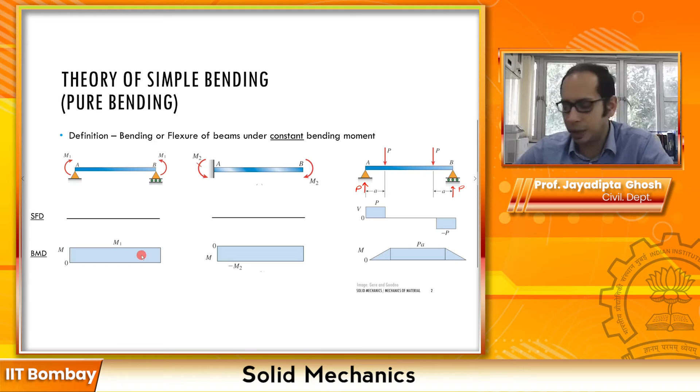Now why do we have a constant bending moment? Remember the formula we derived while looking at the relationship, dm/dx equals v. So for the moment to be constant, for it to be a case of simple bending, meaning moment is constant, or pure bending where shear is 0 - if you put v equals 0, that means your moment is a constant bending moment. So this is one of the cases.

And here, if you just take a look at the moment, how do we expect this beam to bend? This beam would most likely bend something like this. So it is a positive convention - remember the sagging effect, which we term as positive. As you see, the entire bending moment is in the upper half plane - it's a positive m.

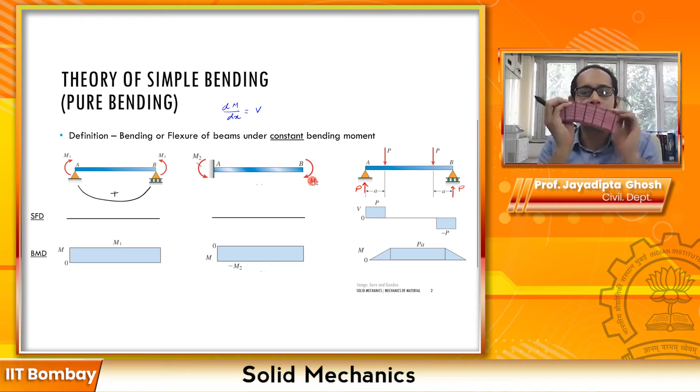In contrast, if you look at the second beam where you have a cantilever and you're applying moment m2 - so what you're seeing is a hogging kind of moment. This beam bends something like this, so it is a negative bending. The entire bending moment diagram is in the lower half plane with a value of minus m2.

In both these first two cases, the shear force is 0 along the entire length of the beam. But if you take a look at the third case, here you have a beam with two intermediate loads P, resulting in two reactions P and P. Now if you draw the shear force diagram for this beam, following the relationship closely, you start with a vertical P, go as a constant line, and here you are meeting a concentrated load.

So there is going to be a jump in the shear. What was P comes back down to 0. Since there is no load in between, you get a constant shear force of 0, and in this region you will have a constant bending moment of PA.

This case is very similar to what we looked at with the weightlifter. If you look at the weightlifter's hands, at the two ends you have the two loads going down, and in the intermediate you have the support. So it's essentially the similar beam, just flipped.

For the weightlifter's case, let me draw it slightly below. So the weightlifter's case will be something like this, where you have the weights going down at the two ends, and intermediate you have the weightlifter's hand.

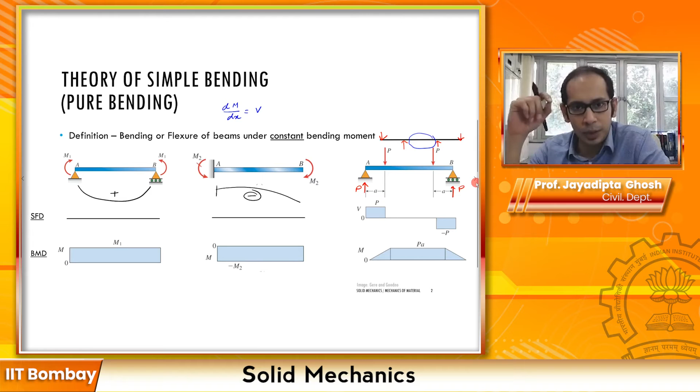Now that we know what pure bending is, essentially it is sections where the bending moment is constant. In those regions where the bending moment is constant, how does the beam deflect, or how does the beam behave? Let us take a look at it.

If you consider sections in pure bending, it bends the beam into the arcs of a circle. If you have a beam, regardless of the cross section - remember we always keep in the back of our mind that the cross section has to be rectangular - that is not the case.

Your beam can have different shapes, as long as it's prismatic, all these derivations and assumptions are valid. So instead of a rectangular cross section, if it's a circular beam or a trapezoidal shape, if you have pure bending with constant bending moments, it is still going to bend in the arc of a circle.

So what it essentially means is that you will have a radius of curvature. Let's say the radius of curvature is rho over here, and this rho along that particular arc stays constant. If this is my point D intermediate, and I mark two more points, B and C, at B the radius of curvature is rho, at D it is rho, at C the radius of curvature is rho as well. So essentially it bends into the arc of a circle.

Now that we understand how the phenomena of pure bending acts, how it deflects the beam, and points along the beam bend into the arc of a circle, in those regions we'll have a constant radius of curvature. Remember, if you have to draw parallels between positive curvature and negative curvature, it follows closely with your concept of bending moment.

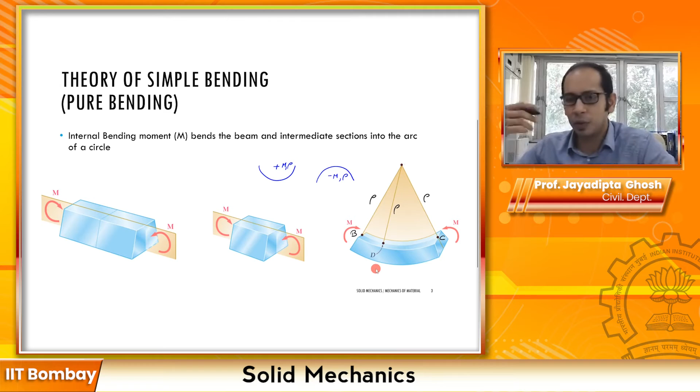So let's go ahead and take these concepts a little bit further. If you consider a beam, for example this cantilever, where at the end you are pulling vertically up with a force P, the deflected shape of the beam is something like this, and from this you can tell that it is a sagging kind of movement.

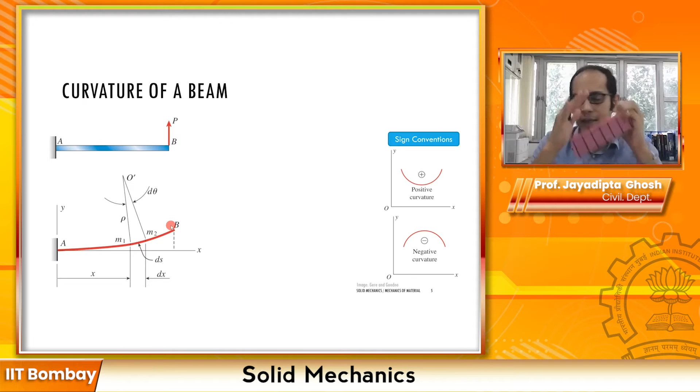So if you are doing like this, it is a sagging kind of movement, so it's a positive curvature that you're looking at. So this is what we were showing, a positive curvature and moment also. Let's make a note of that as well. And this is a negative curvature and a negative moment that you have, right?

So here, if we now have to write the formulations for the relationship between the curvature and the angle, since we are saying that this bends in the arc of a circle, we have this rho over here, and say this beam was originally around the x-axis, and for small deflections, let's try to write some of the relationships that might exist. So this length ds, which is a small arc of the circle, we can express as rho times d theta equals ds, where rho, which I marked, is nothing but my radius of curvature.

Now, what is the relationship between the radius of curvature and curvature? We have kappa, another Greek symbol you're probably familiar with to represent curvature. So kappa equals 1 over rho, and kappa is nothing but the curvature, the reciprocal of the radius of curvature. So what we can get from these two relationships is that kappa equals 1 over rho, which will be equal to d theta by ds.

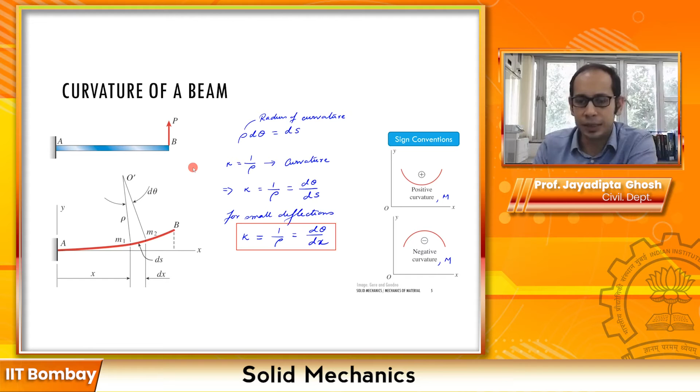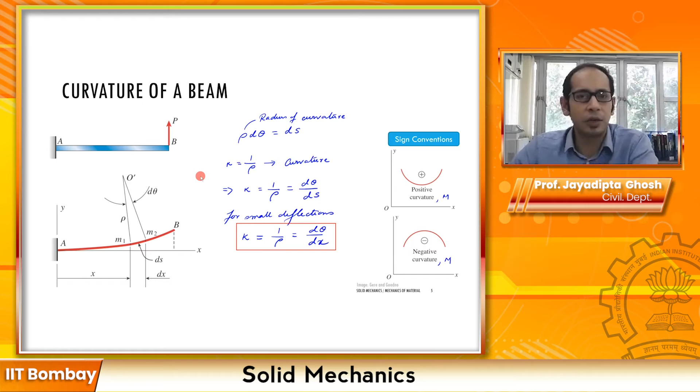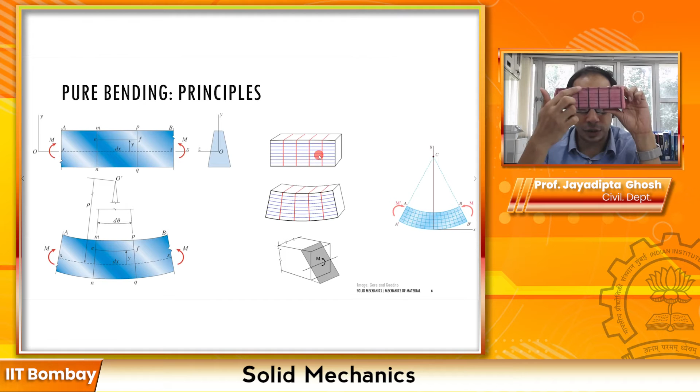If you consider this top black line between the end vertical lines, and this bottom black line over here, initially in the undeformed configuration, both these lines, the top one and the bottom one, are of the same length.

Now when I am bending this one over here, can you see the change that is happening? The top line actually contracts and the bottom line expands. So what does that mean, and what kind of moment is this? This is sagging, a positive moment, right? So there is a reduction in the length of the top line but an expansion in the length of the bottom line.

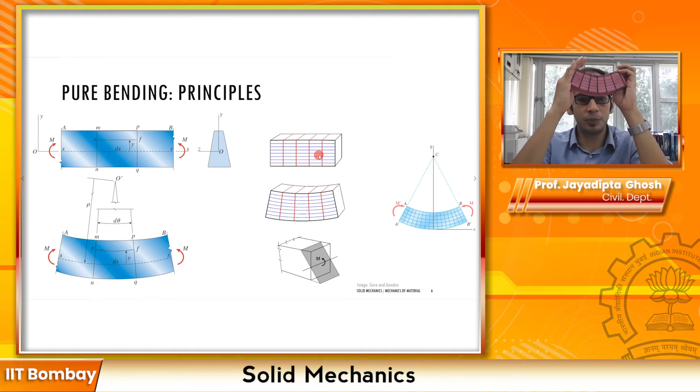Of course, if you're bending it the other way, you will have a completely opposite phenomena, where the top line undergoes an increase in length and the bottom line undergoes a decrease in length. So if one of the lines is decreasing and the other is increasing, in between the top and the bottom there must be one line which does not change length at all.

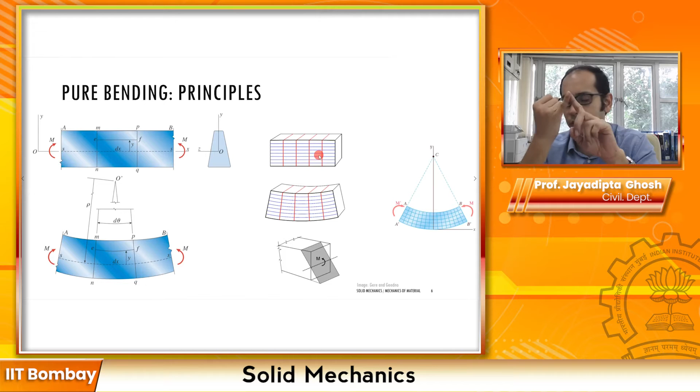Okay, so what are the three things we looked at? First is that plane sections before and after bending remain plane. So there is no warping, no sections being twisted out of place. The plane sections remain plane.

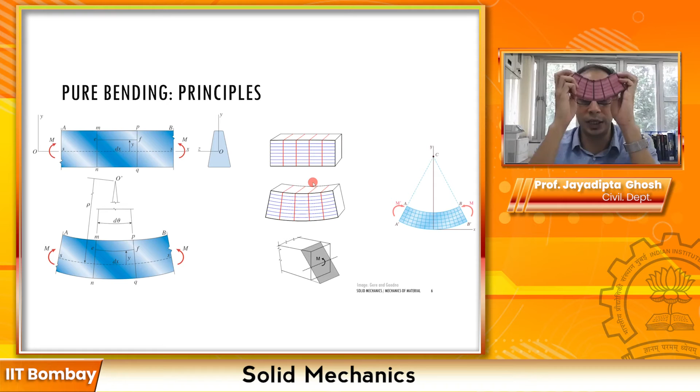Looking at the positive bending moment case, the top line contracts and the bottom one expands. The top line contracting means the top part is undergoing compression, a shortening in length. Whereas the bottom part of the beam is undergoing tension because it is undergoing an expansion in length.

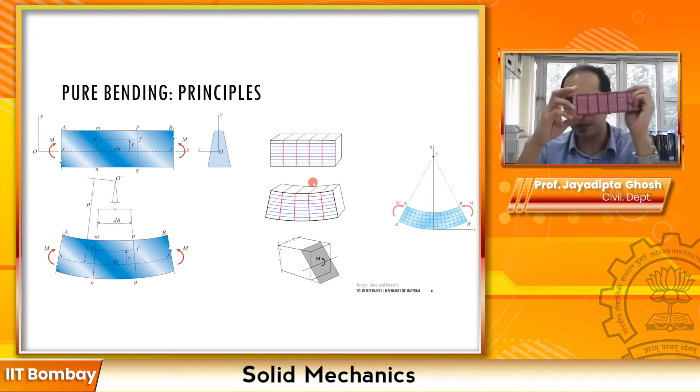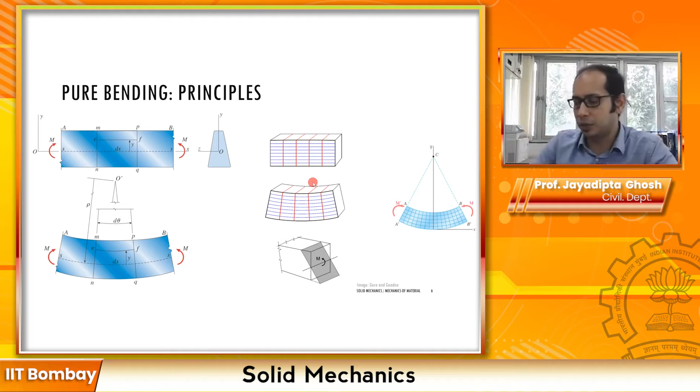And consequently, in between the top and the bottom, you must have a line which is known as the neutral axis. That particular line does not undergo any change in length. So that brings you to three of the primary assumptions of pure bending.

It states that plane sections remain plane before and after bending. That's the first one. The second one is that the bottom of the beam is in tension, it elongates, because initially both lengths were the same, now the bottom one has elongated and the top one has contracted. So the bottom part of the beam is in tension and the top part is in compression.

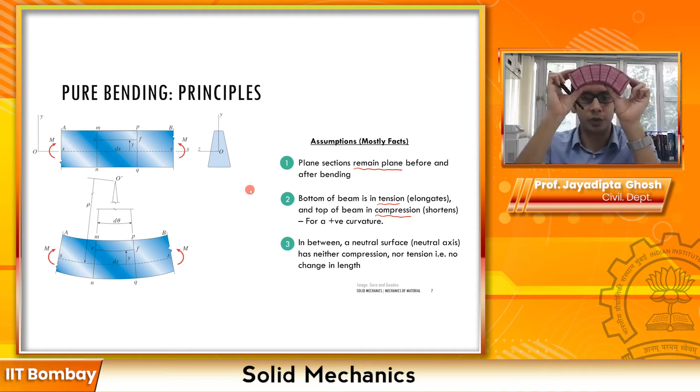But remember, this is for a positive curvature only, for the positive moment and curvature. If you are making a hogging moment, a negative curvature or negative moment, then this statement will just flip, the top part of the beam will be in tension and the bottom part will be in compression.

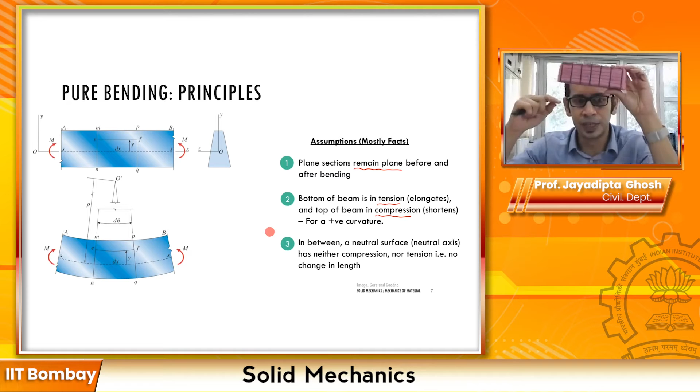And the last assumption is that in between the top and the bottom there must be a line. So among any of these horizontal lines across the length of the beam, there must be one line along which there is no change of length, because the top is shortening and the bottom is expanding. In between, you must have a line which does not undergo any change of length, or in other words, it has no tension, neither compression.

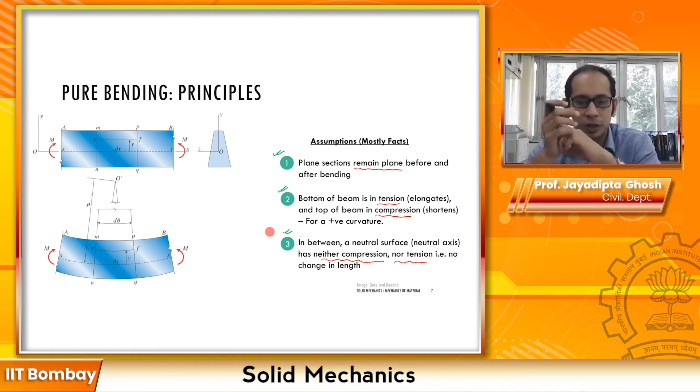So these are the three fundamental assumptions, or mostly facts, because for pure bending these are facts: plane sections remain plane before and after bending; the bottom part of the beam is in tension and the top part is in compression for positive curvature; and in between you must have a plane which is very importantly known as the neutral axis, often written as NA in books, where there is no change in length, or essentially no tension or no compression.

What we're going to do next is take these assumptions and look at the cases where we derive the flexure formula, making use of some of these assumptions and also the curvature formula that we looked at.

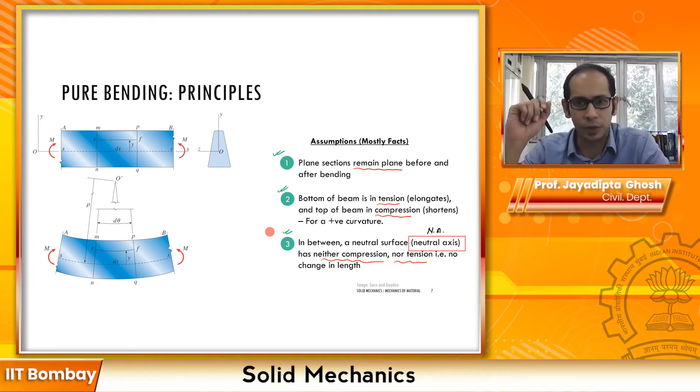Now we are going to derive what is known as the flexure formula. Previously, if you remember, we derived the formula for axial loading and the torsion formula. So now we are going to specifically look at the case of bending.

If you remember, where we had left off was this beam under pure bending, with an M and an M. Some of the assumptions are that plane sections remain plane before and after bending, and the top part contracts while the bottom part expands - that is, the top is in compression and the bottom is in tension for the case of a sagging moment. In between you have a line which does not undergo any tension, compression, or change of length, known as the neutral axis.

So in this beam, let us mark this particular dotted line - let's say that is the neutral axis for our beam. There are ways to find this neutral axis that we will take a look at later. So we have this neutral axis where there is no tension and no compression, the length remains the same.

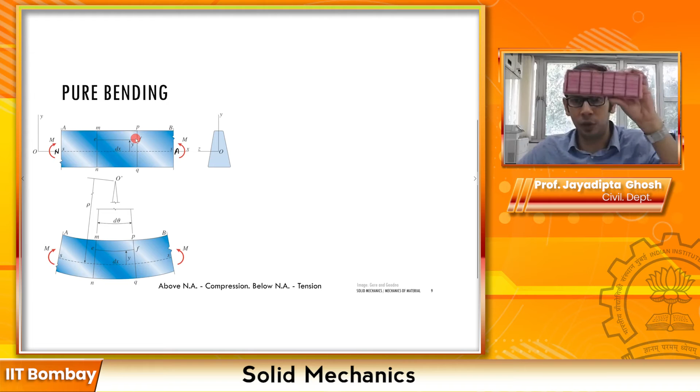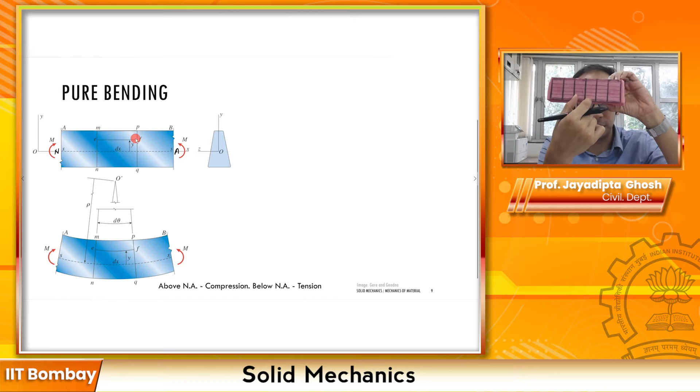Now before this beam, before you applied this moment M, this beam is straight. So whether you're looking at a length of dx at the neutral axis, or at the top or bottom, the length of each of these smaller chunks equals dx.

But the moment you apply these bending moments, the length of the line along the neutral axis stays as dx, because remember, the neutral axis is that line which does not undergo any change of length. So that length stays as dx.

But if you take a line above the neutral axis, in the region where you're having compression, that line contracts. We had seen that the top part of the beam, the upper half of the neutral axis undergoes compression, and the bottom half undergoes tension.

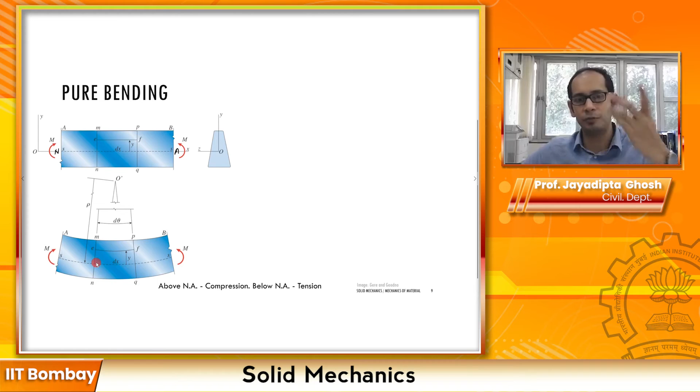So now let's start to write some of the formulations we may get when looking at these kinds of beams undergoing this level of bending.

So as we discussed, if we mark some of these points, this EF - I'm looking at this line segment EF. The original length of EF that you see here is just dx, because it has not undergone any deflection.

So the original length of EF is dx, which is the same as the length of this neutral axis, and the length of this line segment along the neutral axis has stayed as dx. But now in terms of this d theta and the radius of curvature - remember rho is the radius of curvature - I can write dx as equal to rho times d theta.

Now let's take a look at the same line EF again. What is the deformed length of EF? This EF is at a distance y from the neutral axis, and after the beam has bent, this EF has undergone a shortening. That's what we've seen - above the neutral axis the lines undergo shortening.

So what is going to be the length of this EF? That can also be easily calculated. That is going to be rho minus y times d theta. So EF is going to be rho minus y d theta.

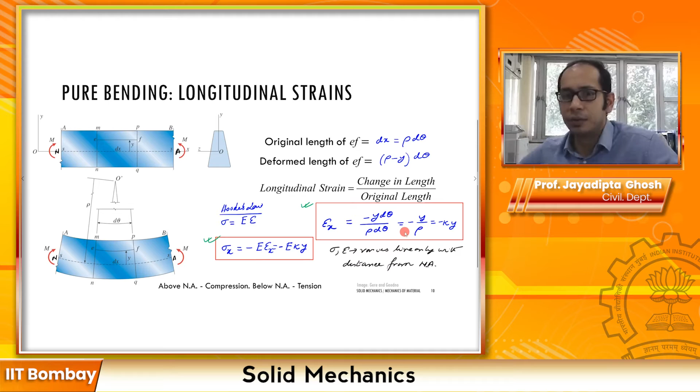So that's the only reasoning behind this particular sign, and no other reasons. If you understand the logic, you get a hang of it pretty soon. So now this is the general formulation that we get.

So to summarize quickly, this is a great way to visually see: this entire section, what was plane over here, this section was this rectangle. After bending, the plane section has remained plane and it has just bent something like this. Now as a consequence of that, at the middle line you do not have any stress or strain. So about this neutral axis, you have essentially this plane which is undergoing... you have a plane along the length of the beam which does not undergo any change of length, no compression, no tension, but as a consequence of this section moving like this, you can see that the top part...

It's very simple to visualize as well. If you do something like this, you see the top part is undergoing a compression, bottom part is undergoing a tension. And how does it happen? This is the general formula for that. You are having this compression over here, so you have this epsilon x is change in length, and this is the part where you are having the tension.

You might wonder in the formula, will the bottom part give a positive or negative value? If this is your zero line, you're measuring vertically up for positive y. If you take a point below that, you substitute a negative number, so minus y, and minus of minus y becomes positive.

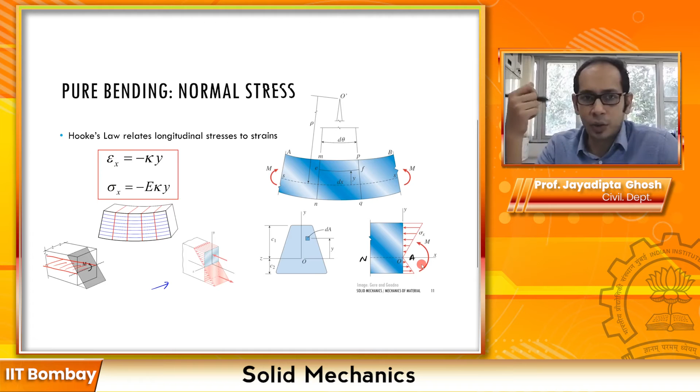Next we are going to use these relationships, especially the one for stress, to derive what is known as the flexure formula. Let's go ahead and take a look at how to derive it.

We're looking at the fundamental flexure formula, also known as the bending formula, which gives a direct correlation between normal stress and applied bending moment. We've seen that at every section of a bending beam, the normal strain and stress vary linearly from the neutral axis as you go above or below, but we haven't seen how these relate to the bending moment. The flexure formula gives us that.

To derive the flexure formula, we will make use of the first two equations of statics. The first is force equilibrium, and the second is moment equilibrium. Before we write and solve these, what comes out of the first equation of statics is essentially the location of the neutral axis.

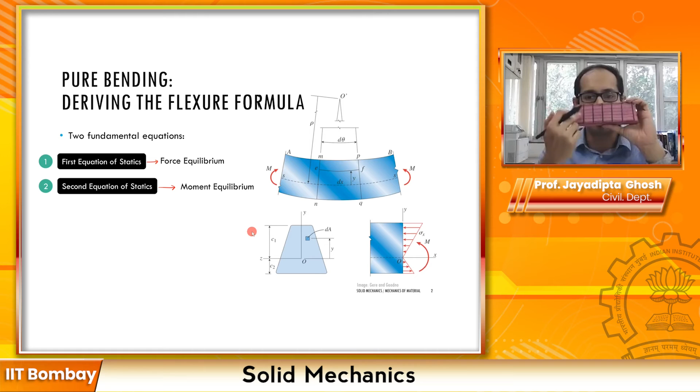When this beam bends, the top part contracts, the bottom part expands, and in between lies the neutral axis where the length remains the same and the stresses and strains are zero. Can you intuitively guess along which line the neutral axis lies? You probably can guess it lies about the centroidal axis.

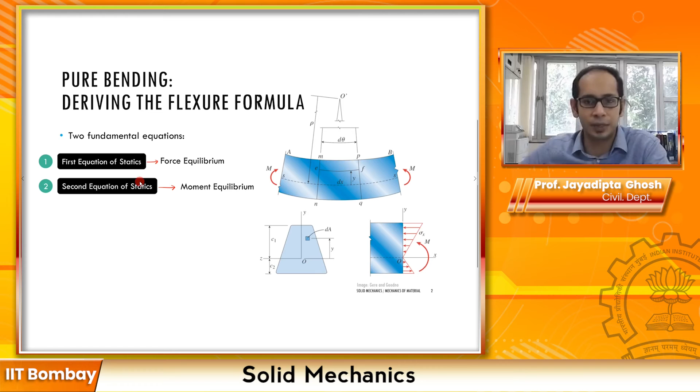The first equation of statics, force equilibrium, gets us that, and the moment equilibrium helps us get closer to the flexure formula. Let's start with the first equation of statics. As I said, it's the force equilibrium, and we won't derive every single equation since these are precursors to getting to the flexure formula, so we'll quickly skim through those.

The force equilibrium is essentially that if we take this cross section of our bending beam, as long as it's prismatic it does not have to be rectangular. The section itself is in equilibrium, and at a distance y, my stress is sigma x. The force acting is stress times area, so sigma x times dA.

Now if we integrate that over this entire cross-sectional area, that must be equal to 0, because the section itself is in equilibrium. It's just bending, the section itself is in equilibrium, it is not translating anywhere.

So if we have to expand this formula, remember this sigma x, which we have already seen from the strain in the last lecture, is nothing but the modulus of elasticity times your curvature times y times dA, equals to 0.

So what does this essentially mean? This means, and this is over the entire area that you're looking at, that the first moment of the area with respect to the z-axis, calculated about the z-axis, is equal to 0.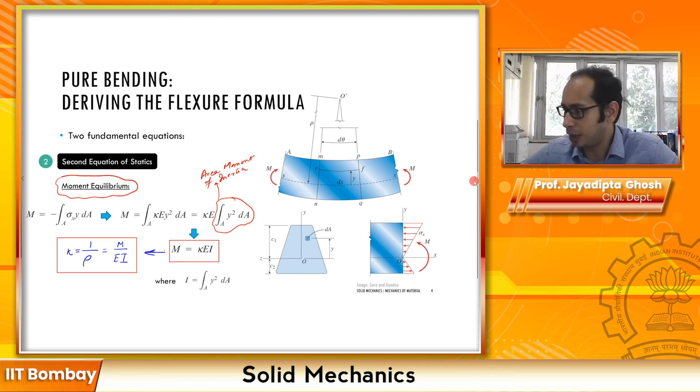Now this relationship is essentially going to lead you to the flexure formula. So let's go ahead and see how the flexure formula is derived. Let's keep this relationship in mind and go ahead and write this equation on the next page.

This is the relationship again rewritten, which we just wrote on the previous page. Remember, this is our positive convention for the moment, this is the negative convention for the moment, and these are the curvature conventions. It tallies because when you have a positive moment, you see the positive curvature, and kappa comes out as positive. When you have a negative moment, kappa comes out as negative. So if you put m as plus, kappa comes out as plus. If you put m as minus, kappa will also come out as minus.

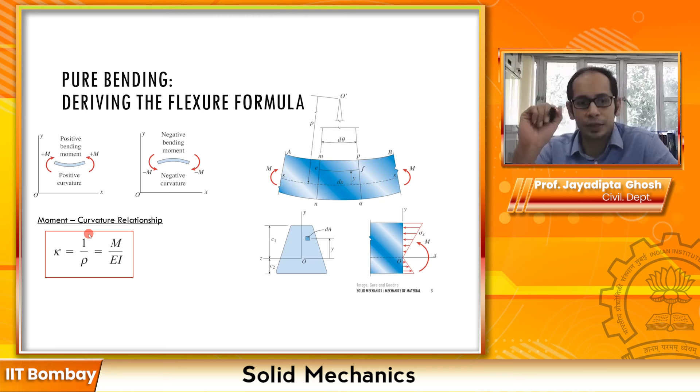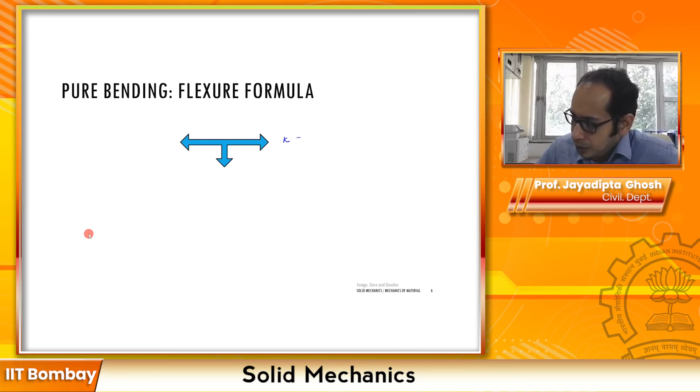Now let's take this relationship ahead and write the Flexure formula. Remember, when we started this lecture, we said the Flexure formula gives you a direct one-to-one relationship between the stress and the moment. So let's write this relationship which we just saw, that kappa equals m divided by EI. This is what we derived in the last page.

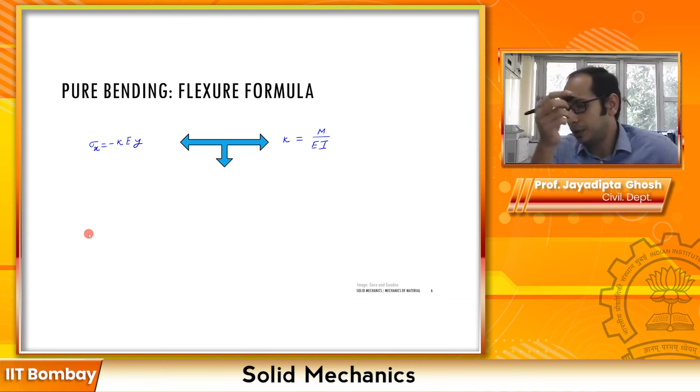Also remember, from our expression between the stress and kappa, what was that relationship? Sigma x was equals to minus of kappa E y. Remember, the strain was y times kappa. So your stress from Hooke's law was E times y times kappa, which rearranged gives kappa times E times y.

Now if you take these two relationships, this one and this one, and take kappa and put it into this one, using these relationships on the left and the right, I can write the famous Flexure formula. Let me rewrite that: sigma x is equals to minus of m y by I. So this is your Flexure formula.

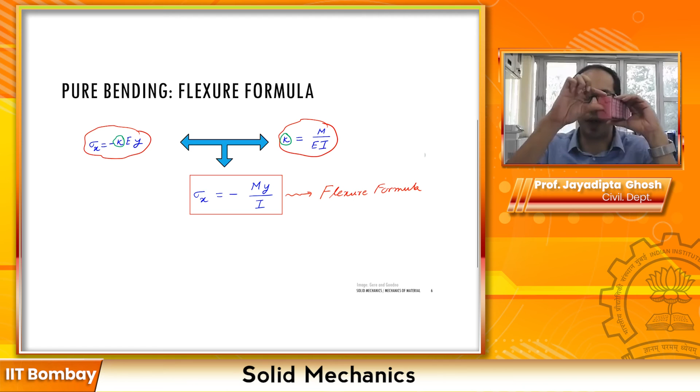So now you see that from this formula you have a direct one-to-one relationship between the stress and the applied moment, and it's pretty intuitive if you think about it. For example, at the neutral axis level, that is at y equals 0, you have no stress and no strain, whereas if you are moving away from the neutral axis, to the y top or y bottom, you will have the maximum and minimum stresses. Depending on the moment, it will be either the maximum tensile or maximum compressive, but you get the overall idea.

Now before we move on, one more thing I'd like to note is this term EI, which you will see mentioned in many textbooks. Can you guess what this EI is called? Remember, when we studied axial load, the denominator AE was axial rigidity. When we studied torsion, we had JG, which was the torsional rigidity.

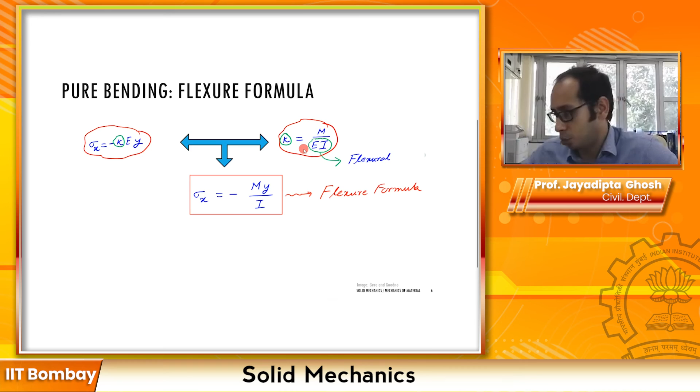Now with EI, the higher the value of EI, the lesser will be the value of kappa. So to get the same amount of kappa, you have to apply more and more moment for a section with a higher value of EI. So this product of the Young's modulus E and I, the area moment of inertia, is known as the flexural rigidity. This is an important thing to know, an important terminology. In many books they just give you the flexural rigidity and you're supposed to know what that is.

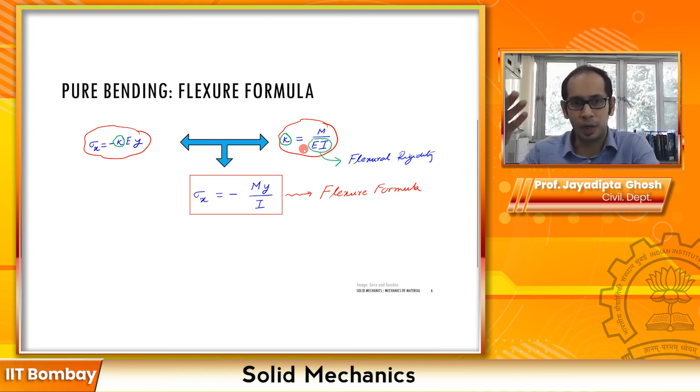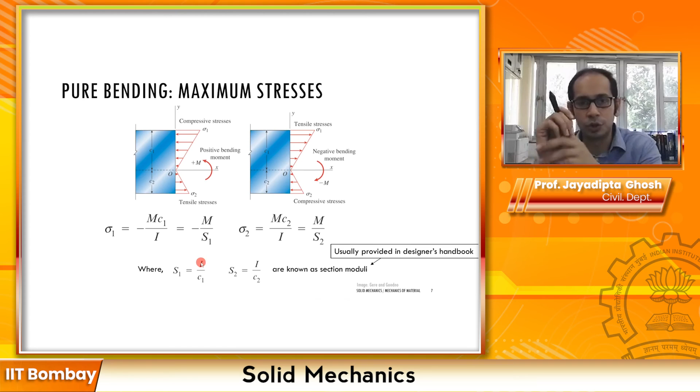Now, one important thing to note is that often when engineers do design, they're given a designer's handbook, and I will show you a couple of pages of that. The designer's handbook essentially has these values, because at the end of the day you're looking at a section. The characteristics of the section to calculate the maximum normal stresses at the top or bottom depend on the shape of the section - rectangular, circular, trapezoid, or anything else.

That dictates your I. And the maximum stress also depends upon the distance, like the top and the bottom. So usually these two quantities are clubbed together into one single unit in the designer's handbook, known as the section modulus S.

The section modulus tells you - your I, regardless of whether you're looking at the top or bottom, is the same, since I just depends on the section. So I divided by C1, the top distance, and I divided by C2, the bottom distance, are known as the section moduli. So you have two section modulus for every section - the ratio of the area moment of inertia to the distances from the neutral axis to the top and to the bottom.

But at the end of the day, in a nutshell, if you're just considering the magnitude, your sigma is nothing but the modulus of M y by I, where y is the distance from the neutral axis. This sigma is positive when it is tensile, and negative when it is compressive.

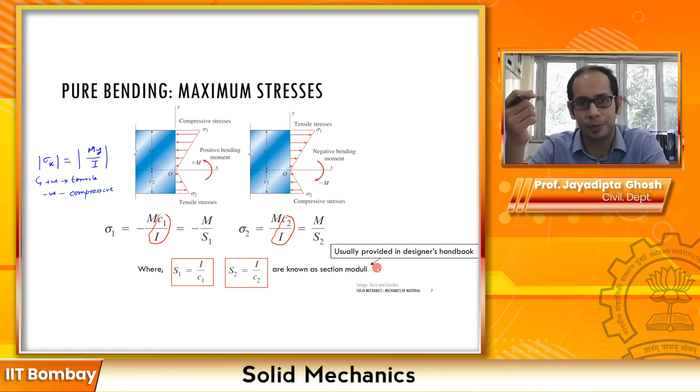If you are too bogged down with the signs and what is positive and negative, no need to worry about it. You just calculate the modulus, take the respective distances, and from your intuition, from how the beam behaves, you tell whether the top is in compression or the bottom is in compression, or the top is in tension or the bottom is in tension. Accordingly, if it's compressive, you put a negative sign; if it's tensile, you put a positive sign.

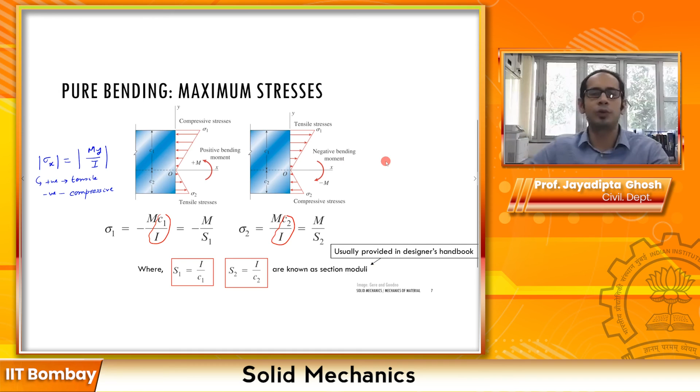Very simple, right? Okay, so let's go ahead and look at some of the very common kinds of sections. What are the most common types of sections in beams? Rectangular section, circular section - let's just write a couple of tidbit formulas for those.

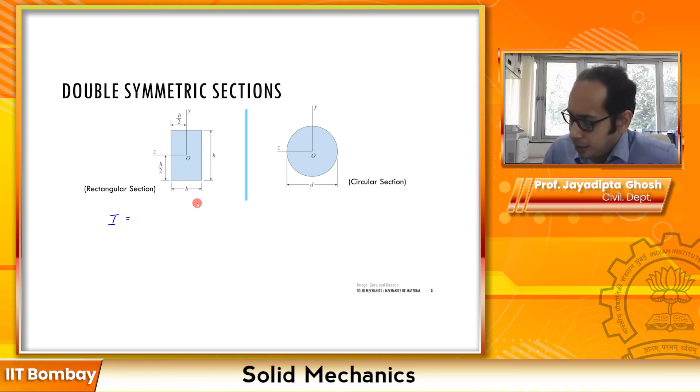For example, if you have something like this for the rectangular beam, you know that your I is essentially 1 by 12 B H cube. The unit of I is distance raised to 4, so mm raised to 4 or meter raised to 4, and so on. And your section modulus - here S1 and S2 are the same, because it's a rectangular section, and your neutral axis is equidistant from the top and bottom.

So your S1 equals S2, which is the ratio of I to C, the distance of the topmost or bottommost fiber from the neutral axis. In this case it will be H over 2. So that is nothing but B H square by 6, once you put I equals to 1 by 12 base H cube. So this is for the rectangular section.

For the circular section, you have a similar kind of formula. For the circular section, your I is equal to pi d raised to 4, divided by 64.

Your distance from the neutral axis, the top fiber and the bottom fiber, is nothing but the diameter divided by 2, or the radius. So you get your S1 equals S2 equals I divided by d over 2, which essentially leads to pi d cube by 32. So the left one is for the rectangular section, the right one is for the circular section.

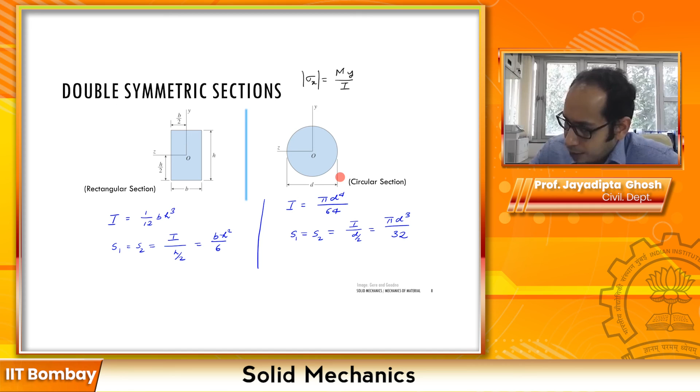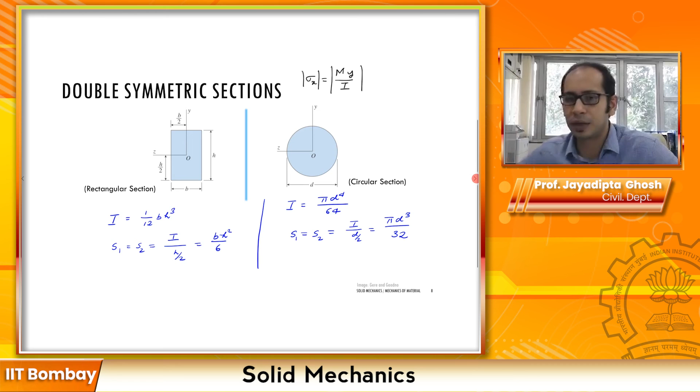If it is positive, if you're looking at the compressive stresses, it will be a negative sign. If you're looking at the tensile stress, it will be a positive sign. Simple. Now talking about the area moment of inertia different sections can have, these are the general formulas for that one, which you're quite familiar with. If you are not, I recommend you flip through some of the very basic standard textbooks in your +2 or any of the engineering or mechanics of materials books.

If you flip through the last pages in the appendix, you're usually given these bunch of formulas. So this is your IZ. If you have a section on the Z axis, this is your IZ, what we just said, that IZZ, remember that it is integral of y square dA, IY is integral of z square dA.

And also you will remember the parallel axis theorem, that if you have your I about the centroidal axis and if you have to calculate it about another axis, that is the I about the centroidal axis plus area times that distance square. So you know these things. If you are unfamiliar, just go ahead and brush it up or look into the appendix.

They give proper explanation in any mechanics of material textbook, and you will see it gives a proper review. For example, the book by Gere and Goodno, Mechanics of Materials, gives a very nice treatise of the review of the moment of inertia.

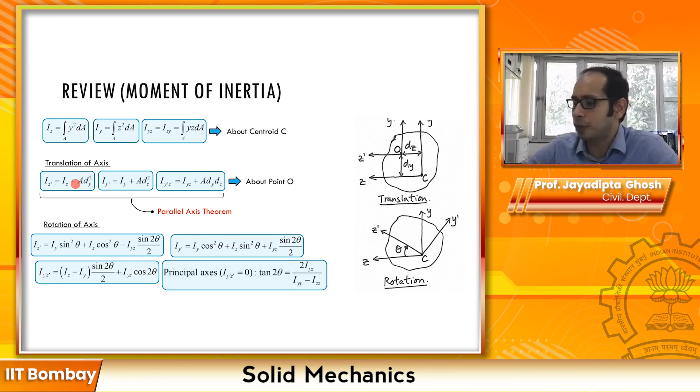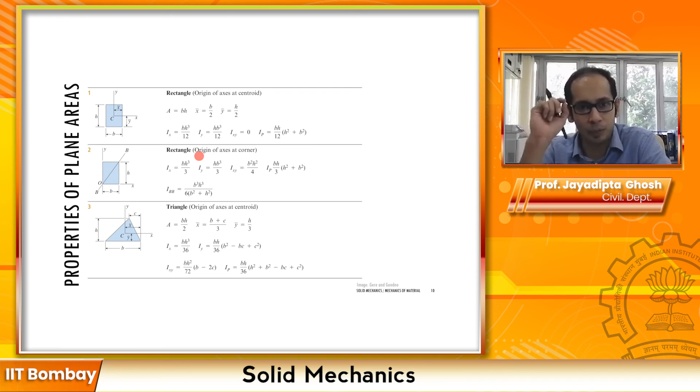Now, as I said, within these books you will also see these kinds of tables which give you for the different sections. Now you should be familiar with how to compute. If you get an odd section which is not rectangular, not triangular, not circular, not trapezoid, you should be in a position to calculate the moment of inertia for that particular section. So make sure you're familiar with that.

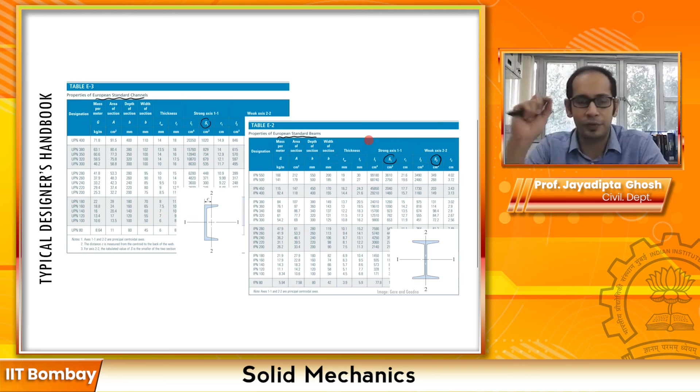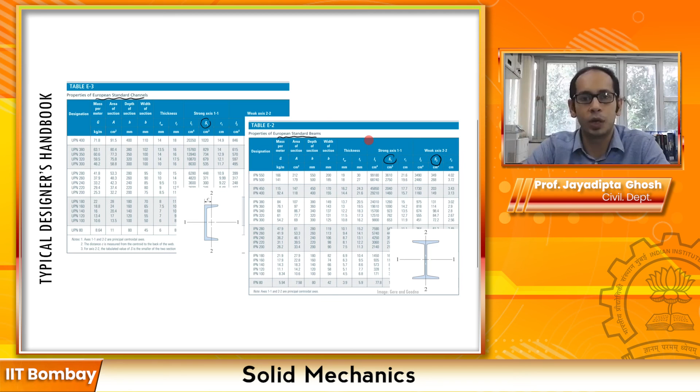Overall, I hope that you are now familiar with the flexure formula, which gives you a direct one-to-one correlation between the stress and the moment. And if you know the stress, you can backtrack and calculate the strain as well. So it is equals to, the curvature is equals to M divided by EI, where the denominator EI is the flexural rigidity. Now we are going to take the flexure formula and we are going to do a couple of example problems to clarify the concepts.